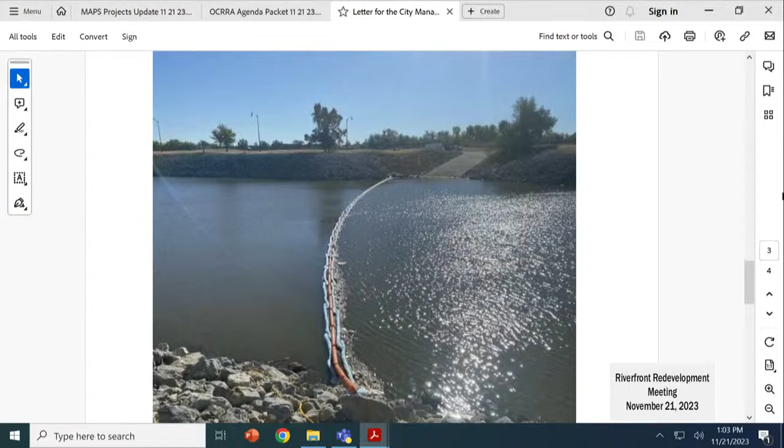Also, one other ongoing project: MB 1593, our Public Works River Maintenance Facility. We're moving along pretty well, and we anticipate completion in February.

Refresh my memory on what that's needed for. Why is that needed? What's it going to be used for? That'll house the remainder of the staff, management staff as well, so it's starting to become its own independent thing.

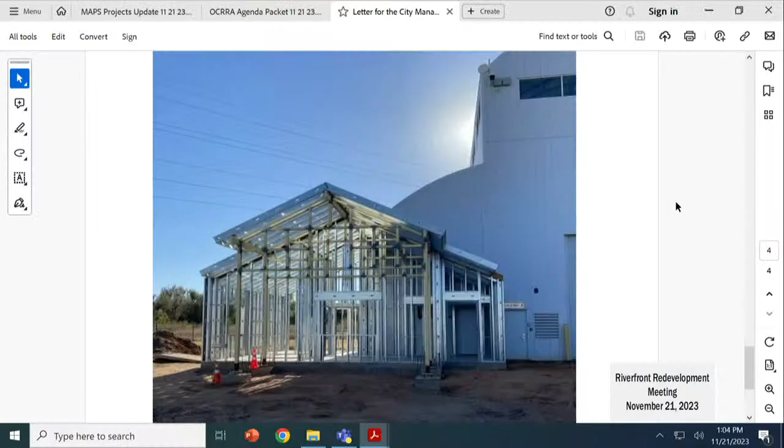Good. Any questions on the maintenance report? Need a motion? Thank you. Cast your vote.

That item passes. Item B is the MAPS project update.

Mr. Chairman, trustees, thank you for the opportunity to present to you on behalf of the MAPS office. I'm Jim Shepard, a senior project manager with the MAPS office, and David's asked me to give this presentation to you today. What I'm going to be presenting is the pedestrian bridge.

As part of MAPS 4, the pedestrian bridge was part of the river enhancements we were to do down there. I'm excited about this because this is the first MAPS 4 project on the river. I've been associated with 5 other MAPS projects on the river, so I'm no stranger down there, but this is an exciting one. The pedestrian bridge is roughly 484 feet long.

It's going to have 5 different piers that come up and support the bridge, roughly 100 feet apart. We're still just finishing up with the plan stage, and I'll go over the schedule with you in just a minute.

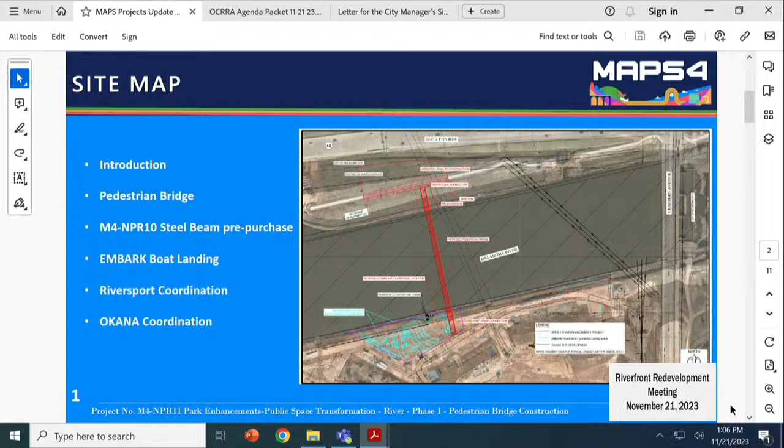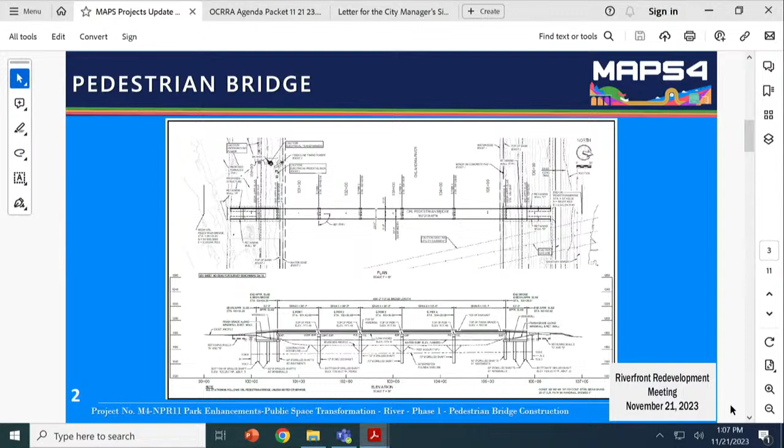This next slide is a little more detailed. The bottom picture gives you a good idea of what the bridge is going to look like from the side. You'll see it's got 6 different pilings that come up and support the bridge until it reaches the banks. Again, each of those are separated by about 100 to 105 feet, and the total length of the bridge is 484 feet, 2 inches. Next slide.

This again is another detail. It kind of shows what the typical trail reconstruction is going to look like where we join in, because this will connect with the trail. And we've got some grade issues down there that we've been dealing with. As a matter of fact, we've recently just lowered the bridge by a foot to get this to all work out once we get to the banks. We've been reassured that everything will clear as far as the boats go underneath it, and this has been run past everybody involved. So I think we're good to go with this, and this gives us an opportunity to meet ADA compliance on those ramps.

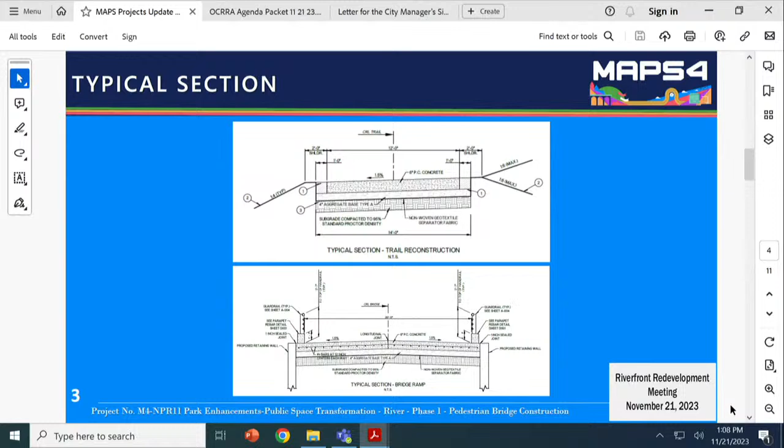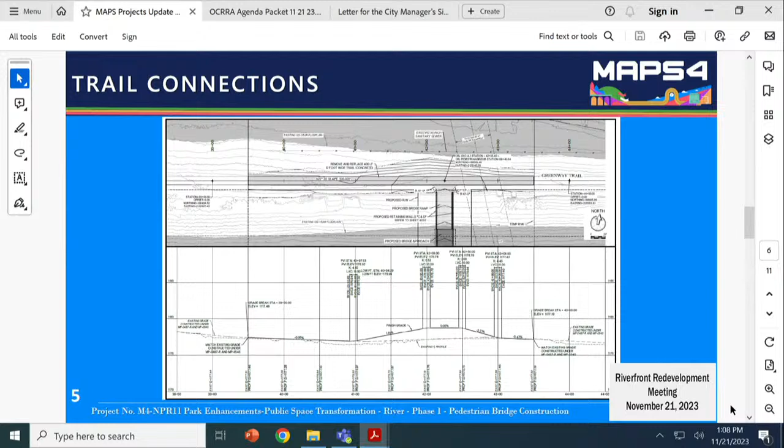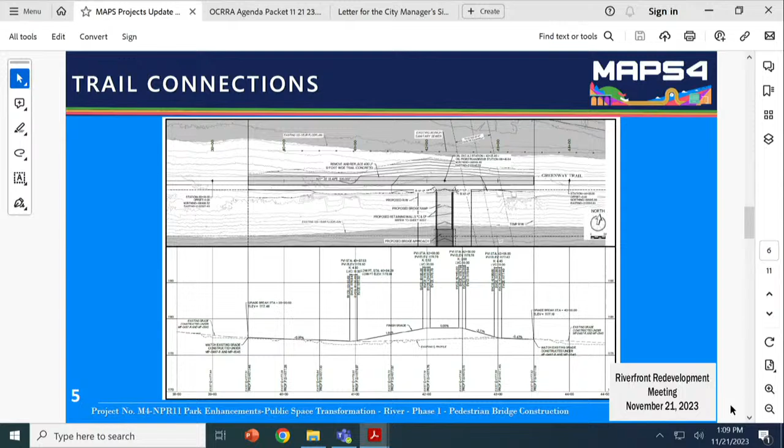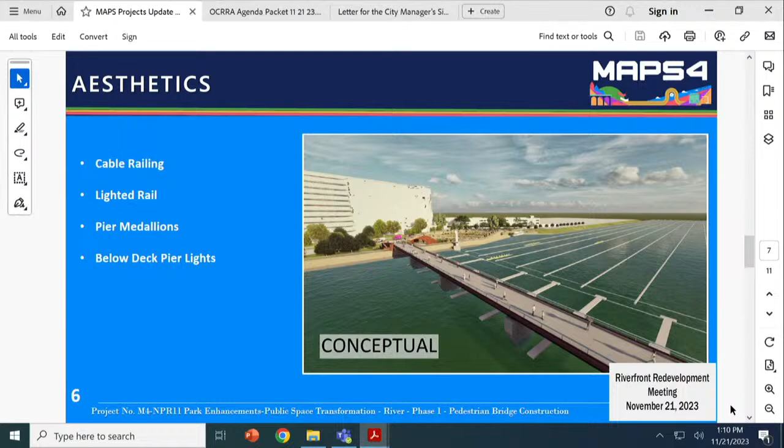Due to budget restrictions, we didn't show some of the amenities that we're hoping can be done to it in the future. But the budget for this project is combined with the dam, the amphitheater, and the beautification. You'll see in a minute what my total budget is and what I'm spending on just the bridge. So we had to really kind of go about this in a bare bones perspective and hope that we can come back and add some more amenities to it down the road.

The decorative panels on the side of the bridge themselves are going to go out in a secondary effort. The LED light poles and handrail lighting, the accent lighting, there's lighting that broadcasts from the bottom of the handrail, but there's also accent lighting that can go with the handrail. And then the light poles themselves, there'll be 18 of those that go across the bridge.

A minute ago, I mentioned the fact that we've got a host of folks involved with the approval and permitting process of this. The U.S. Corps of Engineers, we've got the 408 and the 404 permits. One deals strictly with the elevation and how we're affecting the elevations along the riverbanks, and the other deals with how we're affecting the downstream part of the river, that we're not going to create any problems downstream. The City of Oklahoma City building permit was required because we're tying steel and pouring concrete. We're going to have electrical out there and all of that good stuff. Plus, we had to get an address for the bridge. So that's part of the permitting process.